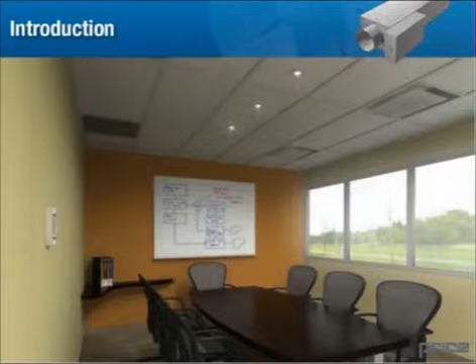The standards and regulations with respect to indoor air quality and ambient sound levels are becoming more stringent all the time. It's imperative for design engineers to have the ability to select and specify products that are assured to meet both criteria effectively. One of the major contributors to noise in an environment can be the terminal unit, the device used to regulate hot and/or cold air to the space.

Although silencers and other techniques can be used to decrease this noise, sometimes layout restrictions or other factors will necessitate close coupling of silencers to terminal units. In this unit, we will discuss the problems that can arise when we attempt this, and how we can solve these problems using Price's pre-assembled, pre-tested, close-coupled terminal silencers.

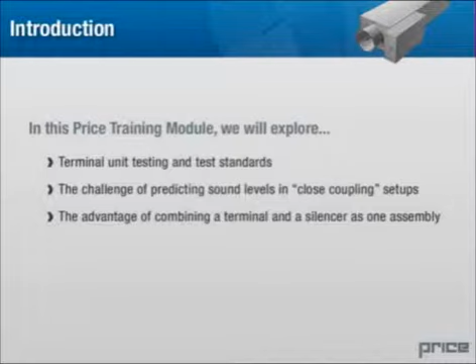In this Price training module, we will explore terminal unit testing and test standards, the challenge of predicting sound levels in close coupling setups, the advantage of combining a terminal and a silencer as one assembly, Price's Quiet Single Duct Terminal Unit, SDVQ, and Price's Quiet Fan-Powered Genesis Unit, FDCGQ.

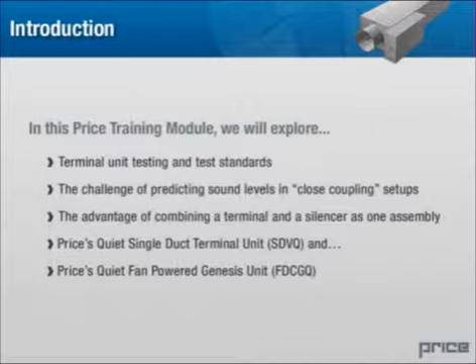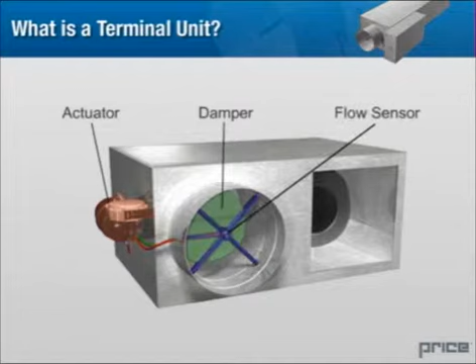What is a terminal unit? The terminal unit controls the amount of air, hot and cold, depending on the unit, that is delivered to a space in response to room temperature. The basic components are a damper, actuator, flow sensor, and related controls. These change with the type of terminal unit being used.

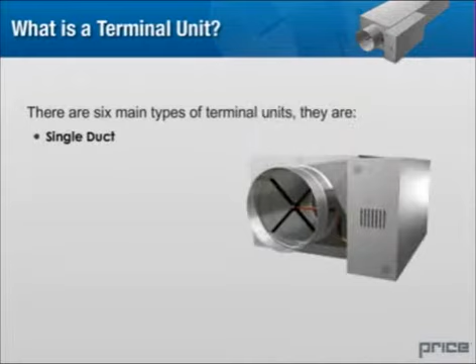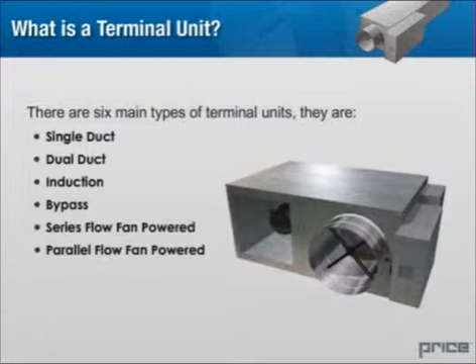There are 6 main types of terminal units. They are single duct, dual duct, induction, bypass, series flow fan powered, and parallel flow fan powered. All of these terminal units are tested in accordance with ARI 880, which is a test standard that is widely used throughout the industry for testing these products.

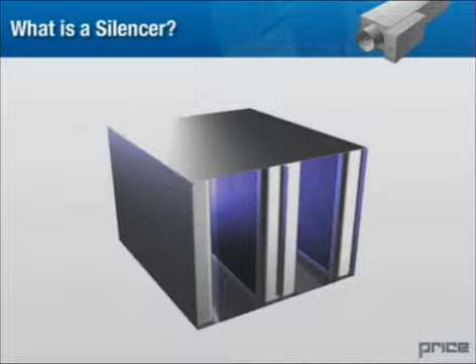What is a silencer? A silencer is a device that suppresses the noise generated by mechanical systems found in HVAC systems, such as terminal units. An HVAC silencer is similar to a muffler on your car. The car engine's very loud in its raw state, but with the proper application and installation of a muffler, you can reduce that noise to a more acceptable level.

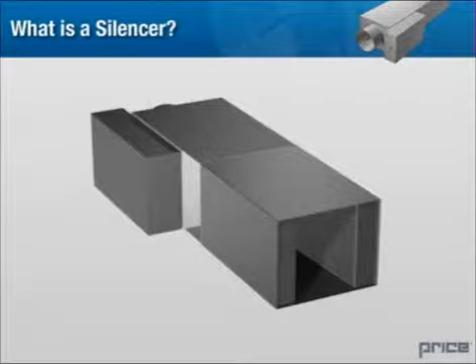It's important to attain proper NC values in areas where you are installing terminal units. If a desired NC level cannot be met with a standard terminal unit, the addition of a silencer can assist in the reduction of the NC rating. The challenge is applying the proper silencer to the proper terminal unit to obtain optimal noise reduction in the desired area. Just like there are different types of mufflers for different types of vehicles, the same applies to selecting the right silencer to fit your terminal unit.

Terminal unit testing and test standards. An integral part of the HVAC designer's job is to be able to predict sound levels of terminal units and produce an NC rating acceptable to the project goals.

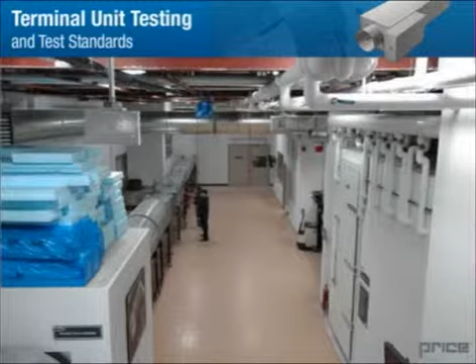Predictions are often made using data acquired in accordance with the ARI 880 test standard. The ARI 880 test standard allows the manufacturer to gather accurate test data for both discharge and radiated sound levels for a given unit. What is the ARI 880 test standard?

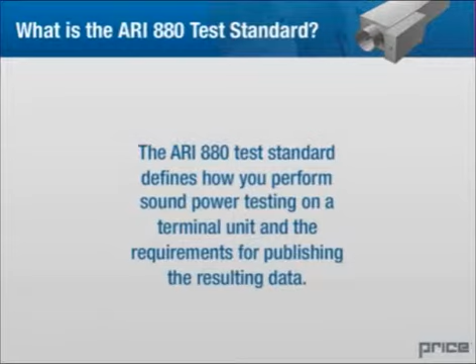The ARI 880 test standard defines how you perform sound power testing on a terminal unit and the requirements for publishing the resulting data. This includes guidelines for physical setup, calibration, isolation, test equipment and methods, as well as rating requirements for units, precision airflow, pressures, and terminal unit settings.

Using the methods outlined in the ARI 880 test standard, we determine the sound power levels produced by the terminal unit in 6 different frequency ranges, or octave bands. This is the raw sound that is produced by the unit in the absence of any external influences.

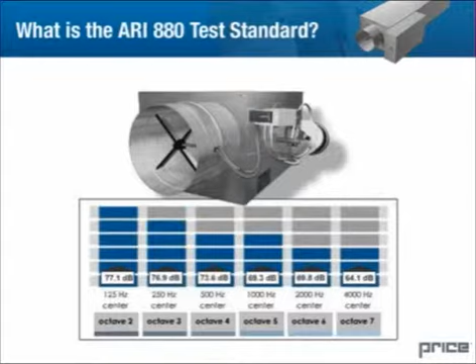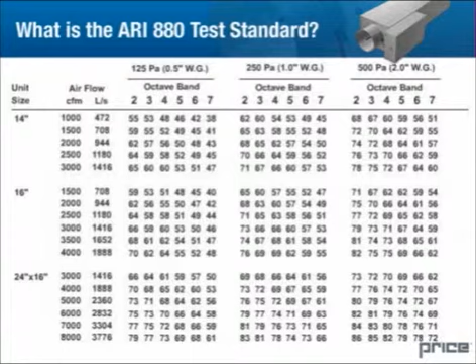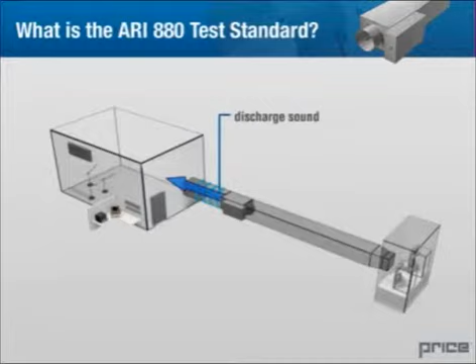The sound power data generated in the test setup is tabulated for the given inlet duct pressure and flow ratings of the terminal unit. In the course of testing the terminal unit, we determine the amount of radiated sound and discharged sound that is produced. For the purposes of this training module, we'll focus on the discharge sound of the terminal units, that is, the sound traveling downstream through the ductwork into the occupied space. NC levels.

Another way that the data is provided by the manufacturers is as an NC level for the terminal unit. An NC level is a single number which represents how loud the device will be perceived to be when installed into an environment. It takes into account the human response to different frequencies, as well as the path that the noise takes to get to the observer.

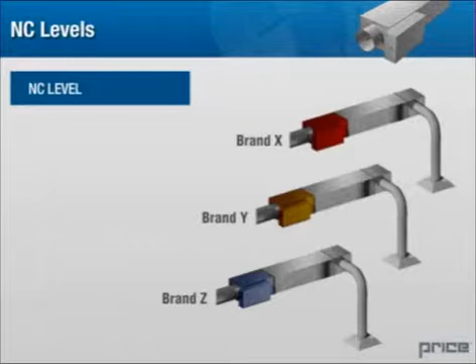The NC level gives designers a good idea of the actual noise level that may be experienced in a room, and a basis of comparison between different products. Noise criteria, or NC level values, have become widely accepted as a measure of room noise levels and as a rating scale for equipment that is expected to stay within those levels.

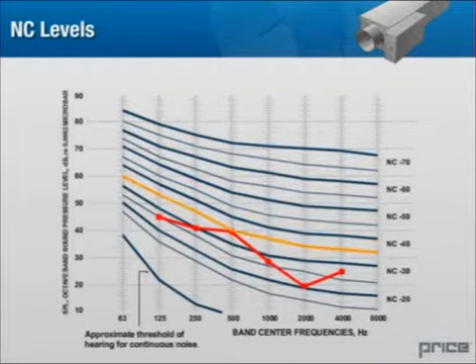ASHRAE has issued recommended space NC values for many commercial air conditioning applications. These standards are used industry-wide. Terminal units should be selected so that the tabulated NC levels are within these designated standards.

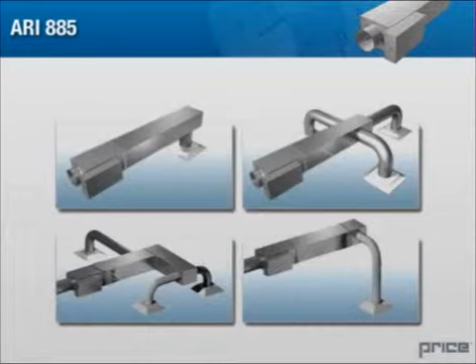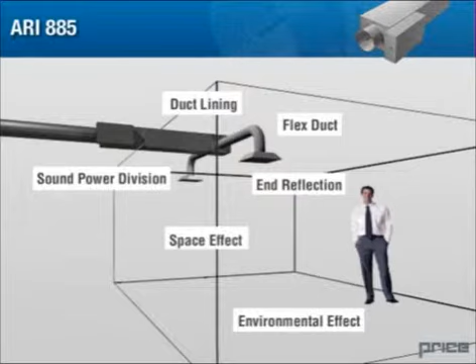Since these products can be used in a wide variety of applications, we must make certain assumptions postulating what effects various duct elements, air outlets, and room characteristics will have on the sound performance. ARI 885 describes a set of typical installation conditions and the attenuation effects that each will have on the noise produced by the terminal unit.

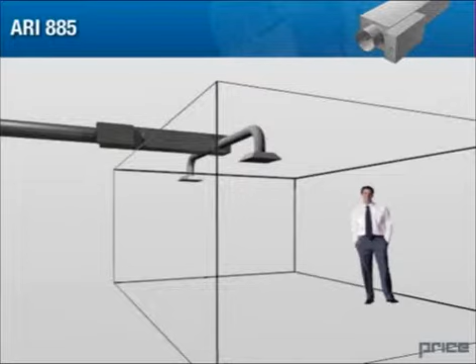These adjusted figures provide an estimate of the amount of discharge noise that will be perceived in the room and provide a basis of comparison between different products. You will see these attenuation values or assumptions printed at the bottom of most reputable manufacturers' catalog data sheets, labeled as a sound power deduction.

ARI 885 gives attenuation values to allow for the following effects.

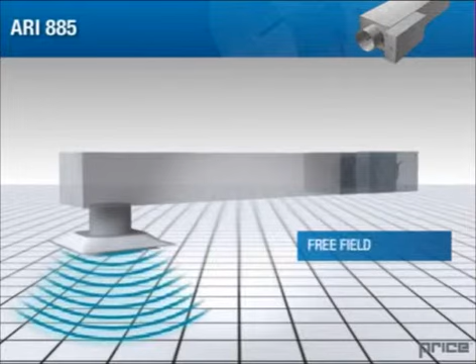Environmental effect: a deduction to sound power levels to correct for the difference between free field reference source calibration and reverberant source calibration. Performance data obtained in accordance with ARI 880 are equivalent to free field power levels, but all real occupied spaces behave acoustically more like reverberant rooms. An average-sized room will tend to dampen lower frequencies found in the discharge sound due to cancellation effects.

Duct lining: the standard allows for 5 feet of straight duct lined with 1-inch thick insulation. This lined duct will absorb some of the discharge sound as it travels down the duct, so deductions are made to account for this.

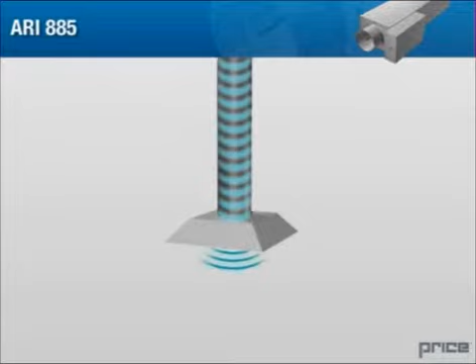End reflection: a deduction to sound power levels to correct for the sound that is reflected back into the duct at the point of entering a room. When low-frequency sound waves pass from a small space such as a duct into a large space the size of a room, a certain amount of sound is reflected back into the duct, significantly reducing low-frequency discharge sound.

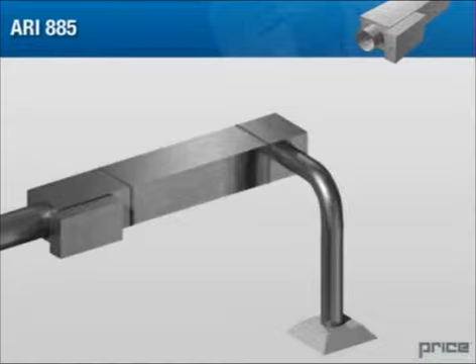Please note that this assumes a straight run of duct to the outlet. Caution should be taken when conditions are drastically different.

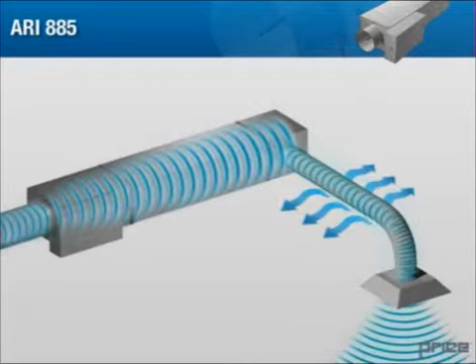Flex duct: the standard allows for 5 feet of 8-inch diameter solid-core non-perforated lined flex duct with 1-inch thick insulation. As sound passes through the flex duct, some is absorbed and some transfers through the wall of the duct. Deductions are made to account for this reduction in discharge sound.

Space effect: a sound source that terminates in an occupied space is assumed to be a point source, and as you travel away from the point source, the sound will decrease. The size of the room and the distance from the outlet will determine how we will perceive and measure the discharge sound. The standard assumes one outlet in a room with a volume of 2,500 cubic feet and a distance of 5 feet away.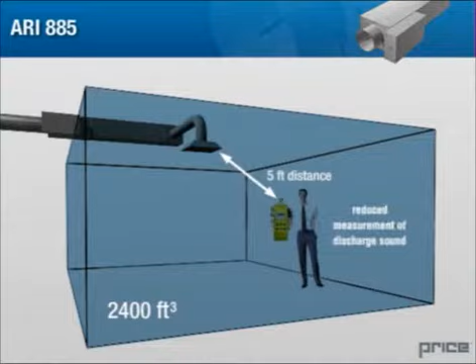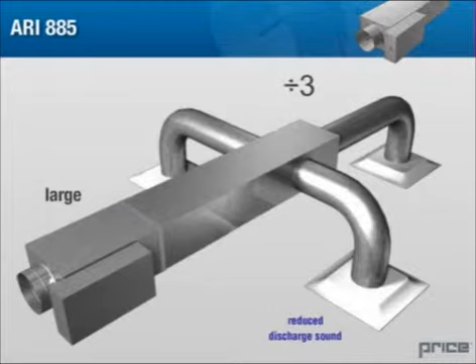Sound power division: at a branch takeoff, acoustic energy is distributed between the branches and/or the main duct in accordance with the ratio of the branch cross-sectional area to the total cross-sectional area of all ducts leaving the takeoff. The standard allows for no branches for small units, 2 equally sized branches for medium units, and 3 equally sized branches for large units. The more branches there are, the lower the discharge sound will be at any single outlet.

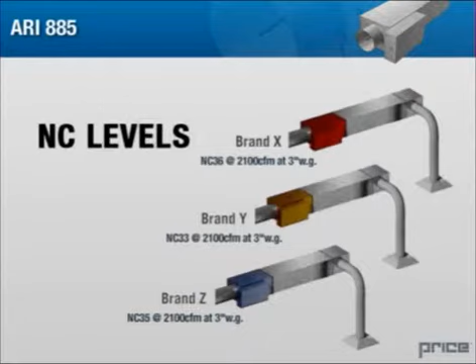These attenuation values typically do not apply to any specific project, but have been developed by the industry to provide an easy way of comparing product sound levels between competitors. Application of the various attenuation values in ARI 885, however, should serve only as a guideline in most commercial applications.

Now that we know how the NC sound levels are produced based on sound power data and the ARI 885 standard attenuation values, we can now discuss some typical selections and their potential misapplications.

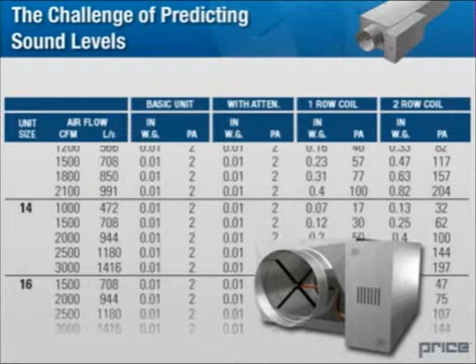The challenge of predicting sound levels. When selecting terminal units based on sound criterion, it's important to understand the way these units are tested and the assumptions the industry has developed to make the products easier to select and specify. This allows us to accurately predict the interaction of the units with the systems in which they are installed.

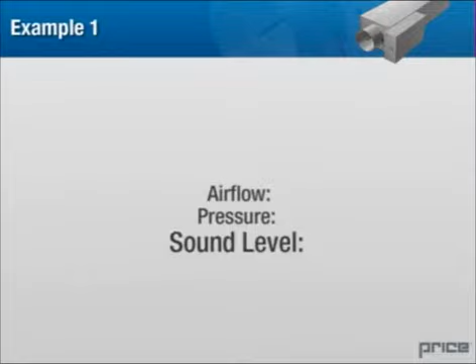Example 1. Once you've determined the airflow, pressure, and sound requirements for a terminal unit, a selection can be made. For this example, we'll use a single duct terminal unit and a requirement of 1200 to 2100 CFM at 3-inch water gauge and an NC requirement of 35 for standard office spaces provided by ASHRAE.

By skimming the terminal's catalog, a selection of a size 12 SDV is within the range of flows and just meeting the NC criterion at its maximum capacity with a discharge NC level of 35.

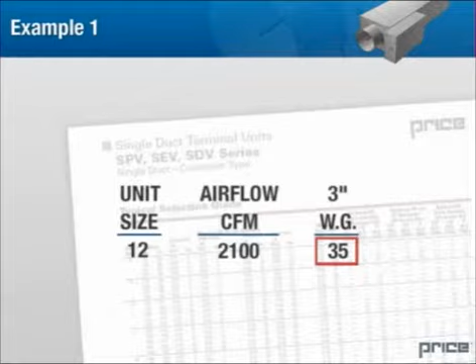Now we have to remember that these NC levels have been based on the standard deductions provided by ARI 885. If we look at these values in detail, there may be one or more items that do not match the actual system used in this example.

Looking at the attenuation values for a large box, we can see that there are several values that are used to generate the NC level of 35 at the maximum CFM capacity of the size 12 unit.

If we were to remove one of these values to match our actual job site condition, like the 5 feet of duct lining after the terminal unit, we can see the effect that it'll have on our discharge NC level.

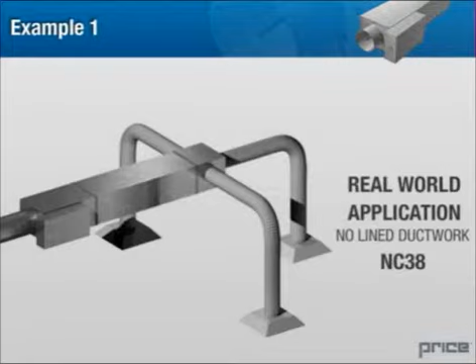So if the project in this example does not include lined ductwork, we have accidentally selected a terminal unit that does not meet the noise requirement.

Example 2. In this example, we will briefly explain sound power division. You can see that ARI 885 allows for attenuation due to sound power division.

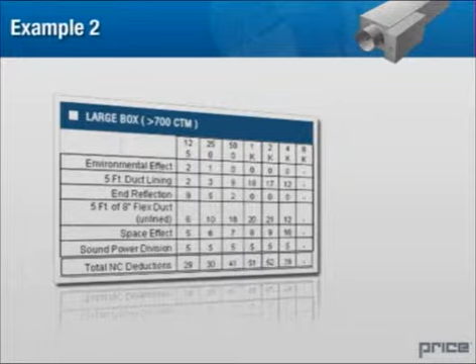You may also notice that the different sizes of terminals have different values for sound power division, ranging from 0 for the small box to 5 for the large box.

Here is why. The small terminal unit is assumed to have just enough airflow to be supplying only one outlet. This means that all of the sound power being discharged by the terminal unit is traveling down this one duct and into the room.

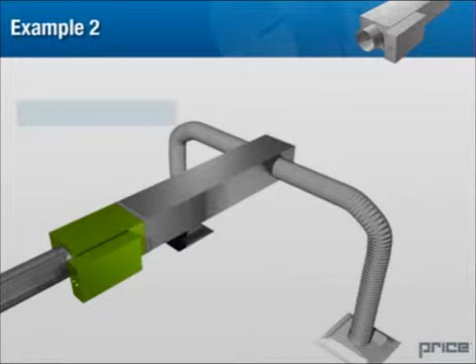When we now look at the medium box, we can see that an attenuation value of 3 is allowed. This is based on the assumption that we are providing enough air through this terminal, that there would likely be 2 outlets in the system, and they are probably providing air to different rooms via 2 equally sized ducts. Therefore, ARI 885 allows for a 3 decibel sound power split.

This means that half of the discharge sound energy is going down one duct and the other half is traveling down the other.

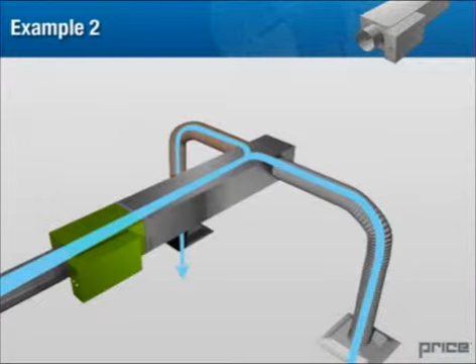Furthermore, if we look at the large box, ARI 885 allows for 5 decibels of sound power division. This would lead us to believe that the standard expects that this terminal unit has enough air flowing through it to provide air to several outlets.

If we take this into account on our example system, assuming that our terminal unit is only providing one room, look at what happens to our discharge NC level.

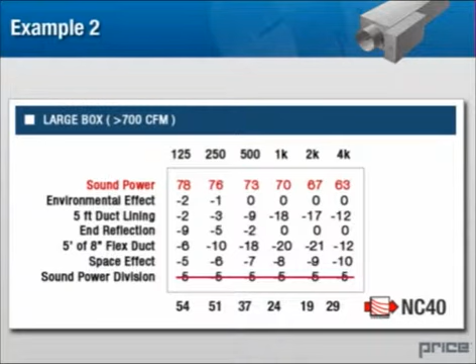Once again, based on the assumptions provided by ARI 885, we may get ourselves in trouble with what at first looks like a good selection.

Example 3. Now let's take a look at another situation, this time for a patient room in a hospital where there is an NC 35 sound criterion.

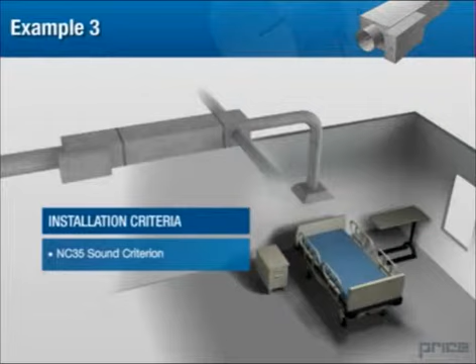In this case, we have the same requirements as before, with the added requirement of hospital-grade or fiberglass-free insulation. Typically, we now have to select a configuration that will not introduce fiberglass fibers in the airstream.

We will have to eliminate any lined ductwork, and we may choose to go with a fiber-free foam liner in the terminal unit.

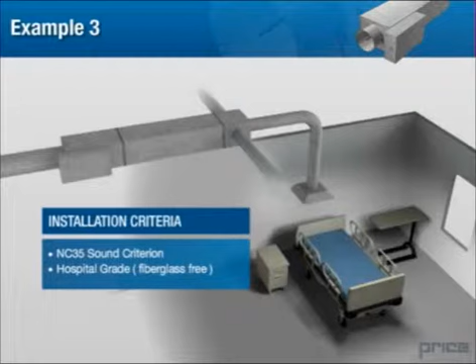Although the discharge NC rating for a standard 12-inch SDV at 1200 to 2100 CFM and 3 inches of static pressure meets our noise requirements, our new fiber-free configuration is significantly louder. By changing the terminal liner type and eliminating lined ductwork, we have a resultant discharge NC level of 41. The deduction for lined ductwork found in the ARI 885 deductions is not applicable to our project.

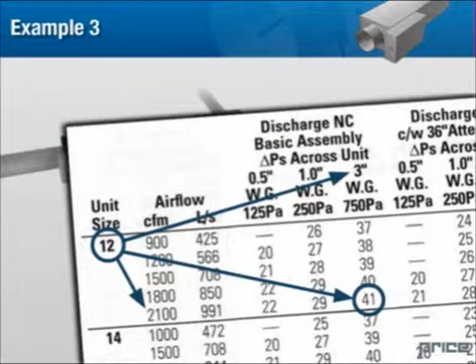While ARI 885 is a good standard for common applications and useful for comparing products, you should be aware of the assumptions involved when designing for specific applications.

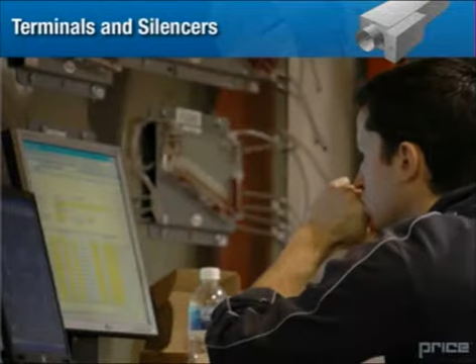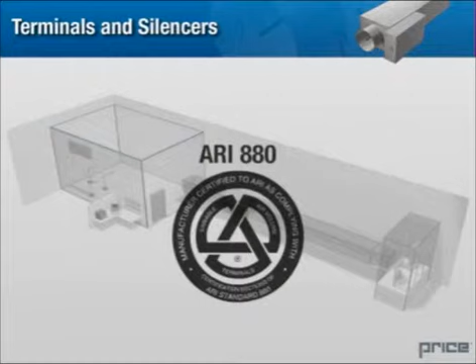Terminals and silencers. As noted earlier, an integral part of the HVAC designer's job is to be able to predict sound levels of terminal units and produce an NC rating. Predictions are often made using the terminal unit test data obtained in accordance with the ARI 880 test method, incorporating standard ARI 885 duct calculations to get the resultant NC levels.

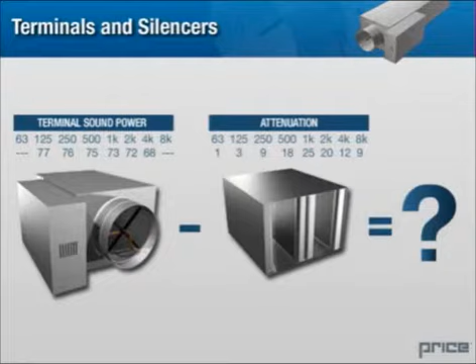The addition of silencers into the system means that the sound power deductions for silencer insertion loss and sound power additions for silencer-generated noise must now be incorporated in order to determine the NC level.

Industry standard silencers are tested under ideal conditions with 5 equivalent straight duct diameters upstream and 10 straight duct diameters downstream. This testing procedure does not take into consideration the interaction a silencer has with other duct components.

Correction factors for system effects and generated noise have been suggested, but designers are often not aware of them, nor are these correction factors fully reliable.

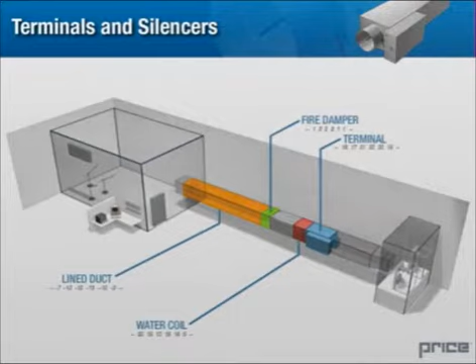An alternate method of attaining NC ratings of silencers is to actually set up the terminal unit complete with silencer in an ARI-certified reverberation chamber and measure the results.

Theoretically, when the calculated and tested values are compared with each other, they should be equal. In actuality, the results can be astoundingly different.

More often than not, the performance of a standard terminal unit close-coupled to an industry-standard silencer does not perform anywhere near what the calculations predicted.

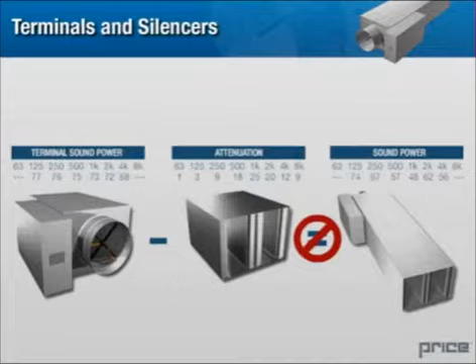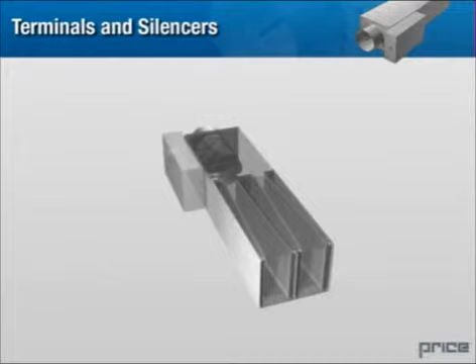In some cases, the terminals tested with silencers directly on the outlet are actually louder than the terminal unit alone. This is caused by the physical relationship of the internal geometry of the silencer and the airflow patterns produced by the terminal unit itself.

As you can see, the predicted NC value for the space is NC20, and the actual test result is NC32. These values are considerably different and can adversely affect the engineer's design.

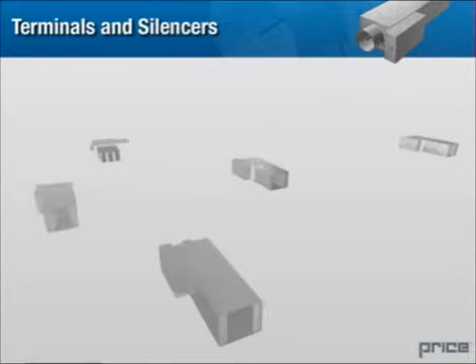We have shown one example here, but after hundreds of tests incorporating standard terminal units and standard catalog silencers, we were able to formulate a definite conclusion: close coupling of terminal units and standard silencers does not produce predictable results.

So how can we ensure that our predictions are accurate to real-world conditions? We'll find out about full terminal unit and silencer assemblies in the upcoming section.

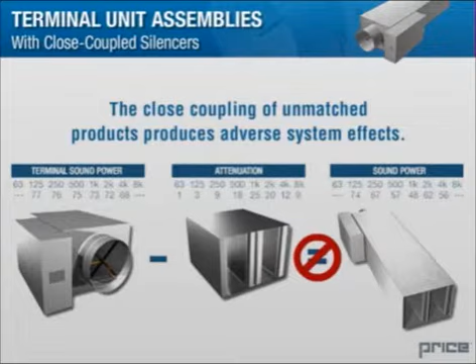Terminal unit assemblies with close-coupled silencers. We have just seen that the close coupling of unmatched products produces adverse system effects, which resulted in inaccurately predicted results, and in some cases sound levels higher than a standard terminal unit without standard silencer treatment.

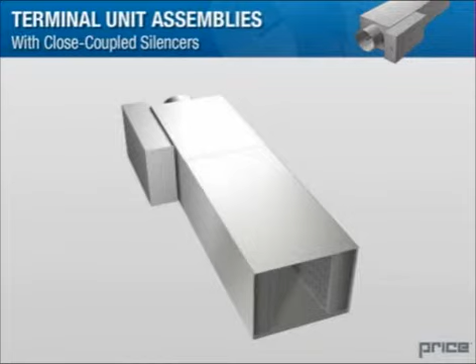To solve this issue, we must take a new and innovative approach to attaining a quieter unit outside of standard configurations. One such concept is to combine terminals with specifically matched silencers in one integrated and fully tested terminal unit product. By testing the terminal and the silencer together as one assembly in accordance with the ARI 880 standard, variables associated with close coupling products from 2 different manufacturers can be eliminated.

The importance of having a fully certified and tested terminal unit silencer assembly for noise-sensitive applications is that design engineers no longer have to calculate insertion loss, generated noise, pressure drop, or even perform a silencer selection to predict sound levels, which in reality may be inaccurate.

Furthermore, Price has done extensive testing to develop internal silencer geometries that greatly reduce the noise levels of the terminal units without sacrificing airflow performance or creating more pressure drop within the HVAC system.

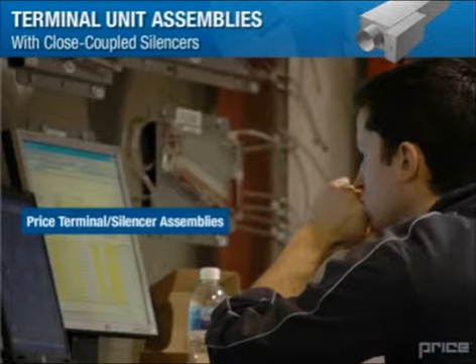In other words, engineers will no longer have to allow for silencer pressure drop or self-generated noise within their systems when they want to specify a Price terminal silencer assembly.

Price has performed hundreds of tests on a wide range of silencer configurations and developed the quietest silencer terminal unit combinations available from either noise control or air distribution manufacturers.

We'll now take a look at some of these Price products. Price Products Overview.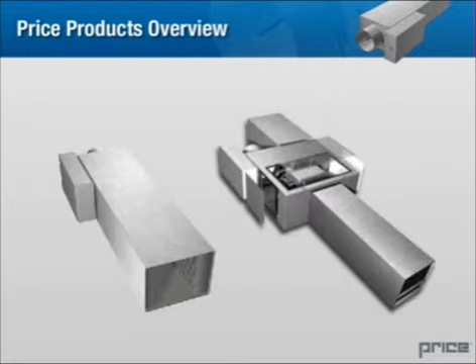Now that we have a better understanding of the importance of terminal silencer assemblies, let's explore some specific samples.

Price is pleased to introduce two innovative terminal unit assemblies with close-coupled silencers. They have been carefully engineered, fully tested, and designed for noise-sensitive applications such as classrooms, libraries, performance halls, and studios. They are the ARI 880 Certified Quiet Single Duct Unit, SDVQ, and the ARI 880 Certified Quiet Fan-Powered Genesis Unit, FDCGQ.

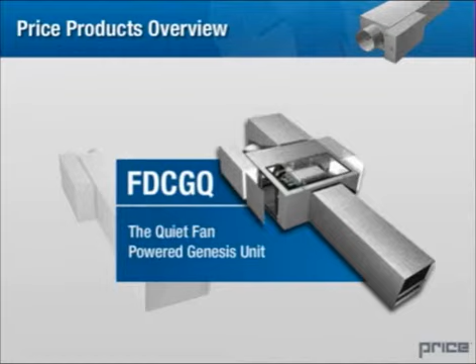Some of the benefits that the SDVQ and FDCGQ offer are perfectly mated VAV silencer design for outstanding performance, and a discharge silencer that reduces or eliminates the requirement for downstream acoustic insulation.

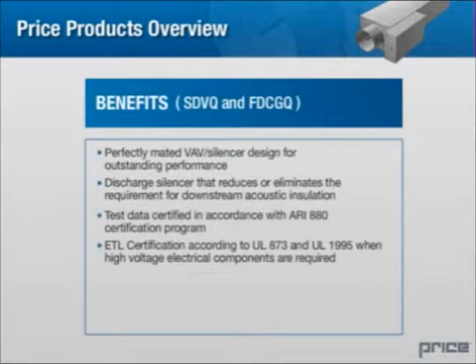Test data is certified in accordance with the ARI 880 certification program, with ETL certification according to UL 873 and UL 1995 when high-voltage electrical components are required, Price's superior SP300 flow sensor technology, and internal geometries engineered to improve resultant noise levels through our terminal without affecting airflow performance or generating higher pressure drop.

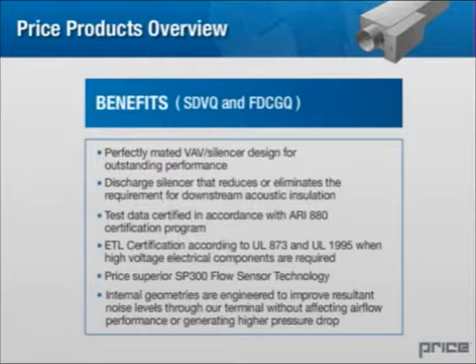In the following section, we'll take a closer look at each of these terminals while examining their features and benefits.

Price SDVQ, Quiet Single Duct Terminal Unit.

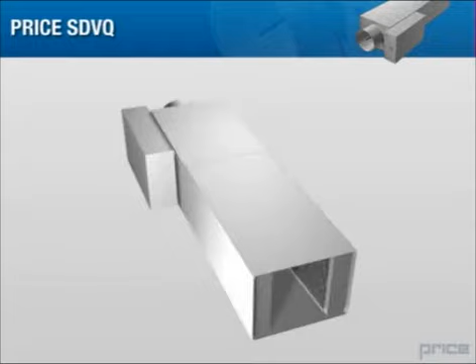Price's Single Duct Q Series VAV terminals are the HVAC industry's first strategically designed, fully tested, and ARI certified integrated VAV silencer terminal units. This terminal integrates both VAV and silencer technology into one complete package.

Extensive lab testing was used to determine the best combination of terminal and silencer configuration, resulting in an assembly which achieves room noise levels of less than NC35 without the addition of downstream acoustic insulation.

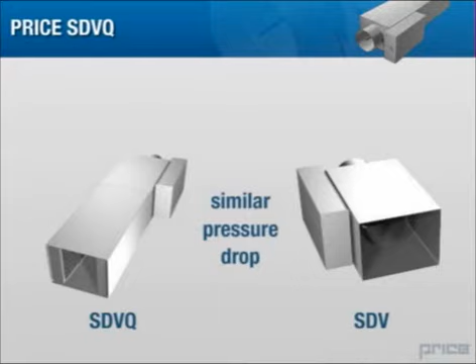These fully tested units with optimized geometry have similar pressure drops to that of standard SDV units. This allows the engineer to eliminate allowances for extra silencer pressure drops in the HVAC system.

The VAV casing is lined with 1-inch insulation for optimum noise reduction and is designed to ensure an even velocity profile into the silencer section.

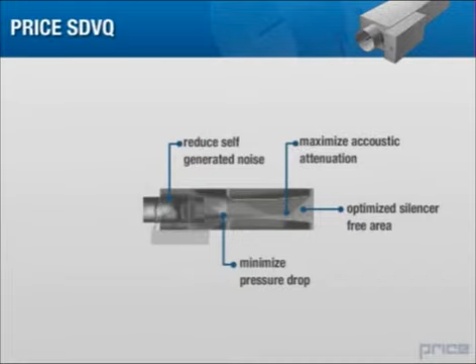The casing design and optimized silencer geometry reduce self-generated noise, minimize pressure drop, and maximize acoustic attenuation. The silencer-free area is optimized to match the terminal capacity, and the unit comes with the proven Price damper assembly with accurate SP300 flow sensor.

In the past, selection of VAV terminals with silencers has been a complex and risky proposition. The designer had to select the silencer from a variety of available models, free areas and sizes, evaluating silencer attenuation, self-generated noise and pressure drop, without really knowing the performance effect of a close-coupled silencer terminal combination.

Price eliminates the guesswork by providing an optimized, fully tested, and certified assembly.

Price FDCGQ Quiet Fan-Powered Genesis Unit.

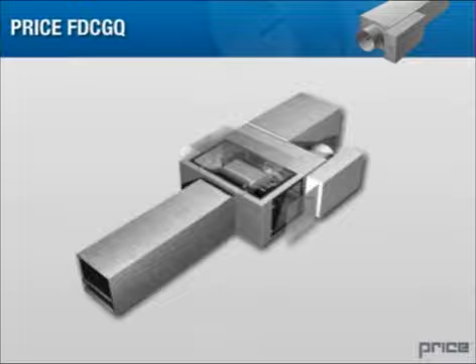Price is proud to introduce the Genesis Q Series fan-powered terminals. The FDCGQ is the HVAC industry's first strategically designed, fully tested, and certified quiet fan-powered terminal with custom-designed discharge silencer.

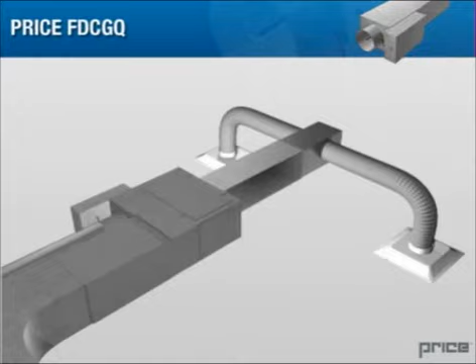While the Price Genesis is the quietest, most durable, easily accessible, and energy-efficient fan-powered terminal on the market, the new Price Genesis Q dramatically reduces discharge sound, eliminating the need for downstream acoustic insulation.

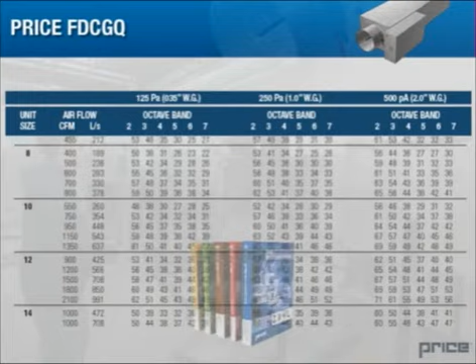The complete VAV terminal silencer assembly has been tested and certified in accordance with ARI Standard 880. The discharge and radiated sound data is presented in Price's catalog and is based on complete assemblies tested in the Price lab. No calculations or system effect assumptions are required to determine silencer performance.

Here are some more features and benefits of the Price FDCGQ Quiet Fan-Powered Genesis Unit: an energy-efficient ECM motor.

It incorporates the innovative design of the Price Genesis with a unique 36-inch long discharge silencer that directly couples to the outlet of the fan, along with the proven Price damper assembly with accurate SP300 flow sensor.

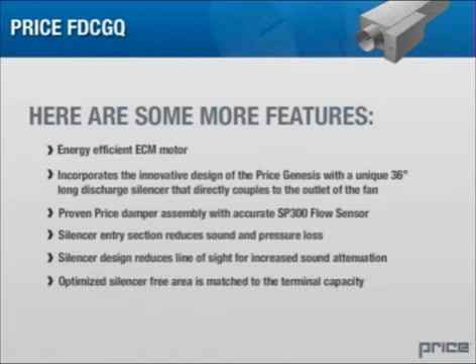The silencer entry section reduces sound and pressure loss. The silencer design reduces line of sight for increased sound attenuation, and the optimized silencer free area is matched to the terminal capacity.

Conclusion. We hope that you've enjoyed this look at terminal silencers. You should now have a better understanding of terminal unit testing and test standards, and the challenge of predicting sound levels in close coupling setups.

You should now also understand the advantage of combining a terminal with a silencer as one assembly, Price's Quiet Single Duct Terminal Unit SDVQ, and Price's Quiet Fan Power Genesis Unit FDCGQ.